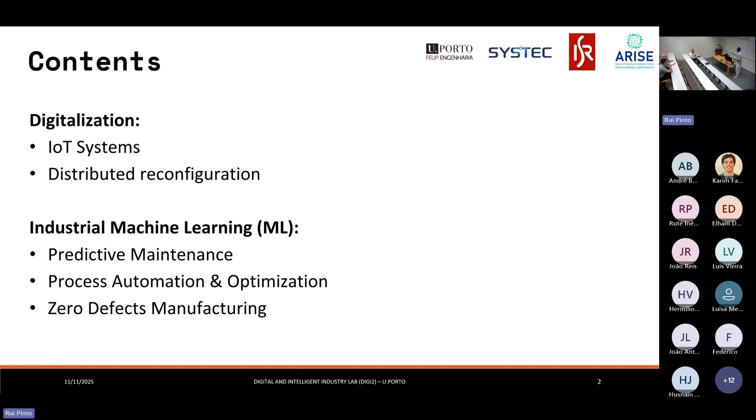So starting with digitalization, we at the lab developed this solution called GECO, that stands for Grip-inspired Environmental Condition Observer. That is an IoT device that is based on the ESP32, which is a kind of board that probably you can use in this course.

In this initial project that we developed, we aimed to develop a solution that would be easy to install in an industrial machine, just to plug it to the machine and start collecting data, in order to avoid having intrusive systems that require stopping the system to install the monitorization system.

This is regarding one of the main limitations we have in industry. Basically, when a machine is working, people from the factory don't want to touch the machine. They want that machine to not have new systems installed and not have someone programming it again. So in order to avoid that and facilitate the adoption of these kinds of systems, we developed this solution that is not intrusive to the machine currently.

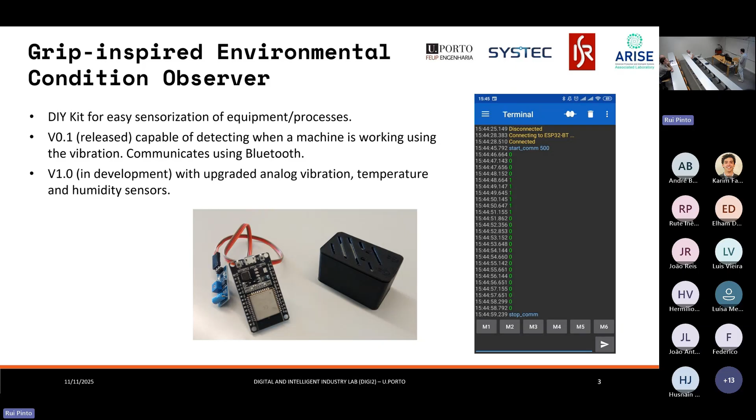As next steps, we aim to add some new sensors to the board, like temperature and humidity, so we can start collecting more environmental data, and also implement the interface for Wi-Fi to communicate via Wi-Fi and not just by Bluetooth.

The second project that I wanted to present to you today is regarding DINASORE. That is a tool that fits on the next level. So we have the IoT devices like the GECO, as I presented before, and in the next level we can have a platform like DINASORE, that is currently a runtime environment that allows the execution of function blocks.

These function blocks are tasks of software. So basically, I can program the system graphically, as you see on top, on the 4diac IDE. I can program the entire system there and then deploy it to a distributed cyber physical system.

So I can have multiple Raspberry Pis. I can program the code of each Raspberry Pi in 4diac and then deploy the code to each one of them.

This is a project that is available online on the following link, so it's open source. It implements function blocks in Python, which facilitates the implementation of machine learning algorithms and data analytics algorithms. So we can have function blocks to collect the data and then function blocks to process that data using the most used algorithms in the community. And it also has OPC-UA integration, which is one of the main protocols used in industry.

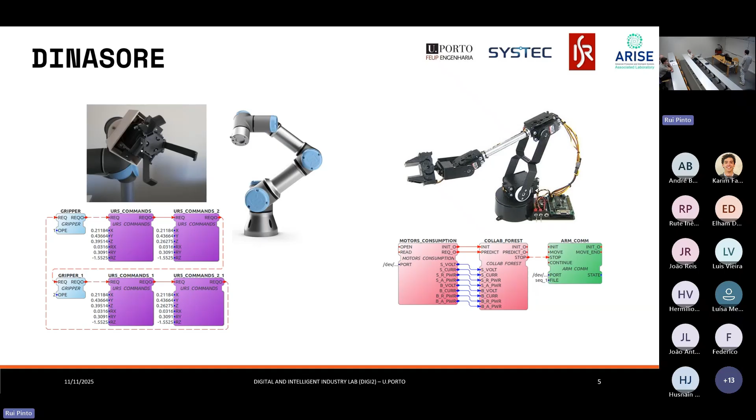Another interesting project about digitalization is the Smart Cut project, where we applied the concept of a digital twin. In that case, it was a simulator we built to allow operators to train to perform some operations.

This Smart Cut project was regarding the development of this digital twin simulator for operators working in the forestry industry. Portugal has a large forestry industry, mainly in Castelo Branco and similar places, producing a lot of wood from eucalyptus and other trees. They have industrial machines to cut and process these trees. In that project, we built a simulator based on the concept of a digital twin so operators could train before going to the real machine, practicing operations before working on it directly.

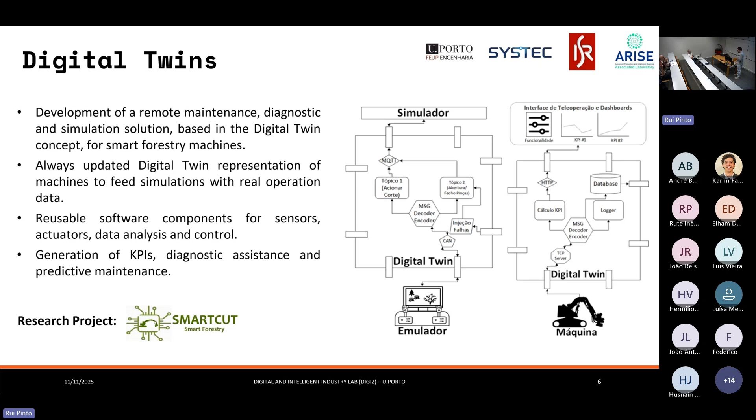We developed a second digital twin for performing predictive maintenance, so we could check when the machine was good or not good, and monitor the status of each machine. One was basically a simulated reality for the operator to train on, and the other was operational, to monitor the state of the machine. We collected different data from different sensors and used that data to try to predict when some components were degraded from the process.

Moving on from the digitalization part to the part more about the algorithms and the use cases we can do with the data collected from the shop floor.

The first use case I will present is regarding predictive maintenance. We have three different types of maintenance: preventive and corrective maintenance, which is basically the type of maintenance we do with our car. For instance, when we change the oil every 5,000 or 10,000 kilometers, we are performing preventive maintenance because we have a fixed schedule to make that maintenance, every 10,000 kilometers, for a particular machine or component, such as the motor of a car.

Corrective maintenance is the opposite: we just perform maintenance when something breaks. For instance, if we have a problem in the car, we go to the mechanic to perform maintenance for that problem. That is corrective maintenance.

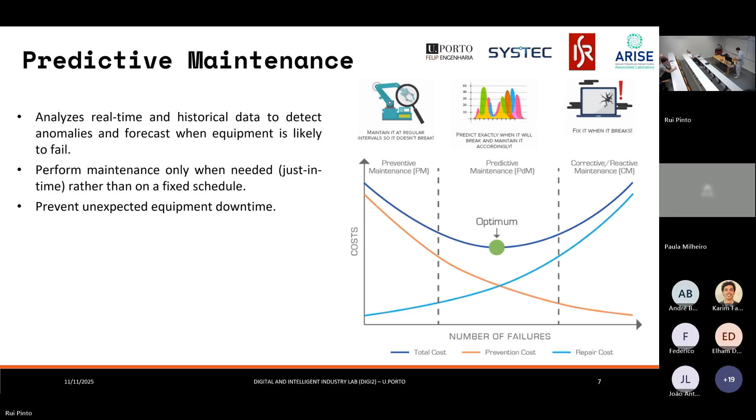One of the projects where we developed these kinds of systems was the Reclaim project, where we developed a system basically to predict when we need to replace a particular component.

In the use case we worked on, it was regarding a robotic arm from an industry we worked with, Gorenje, which is a manufacturer of white goods like fridges, washing machines, dishwashing machines, televisions—similar to Bosch and other manufacturers of white goods. In that process, it is manufacturing the tube of a dishwasher.

A dishwasher has a tube inside. Basically you have two metal sheets, one with a U shape and another with an L shape, and then you weld both sheets of metal together to form the tube of the dishwasher.

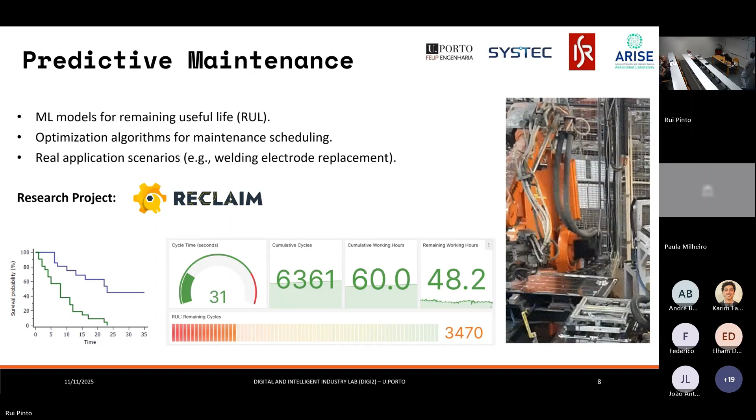The second project where we developed an algorithm for predictive maintenance is regarding the IndTech project. That's a project with a car manufacturer, Stellantis, a big car manufacturer that has a factory here in Portugal, in Mangualde.

Basically, in the factory they have batteries on autonomous vehicles that transport the components for building the cars. Imagine you have different stations, and then you have AGVs, these autonomous vehicles, that transport some of the components for the operators to mount the cars.

These autonomous vehicles have a battery, and in that case it was not a lithium battery, it was another, older type of battery. These batteries have problems — they degrade over time, like the batteries of our cell phones.

In the algorithm that we developed, we aimed to predict when we need to replace a battery. Over time, the battery gets degraded, starting to show degradation, and we wanted to identify when this degradation was higher, so we can replace the battery of the autonomous vehicle.

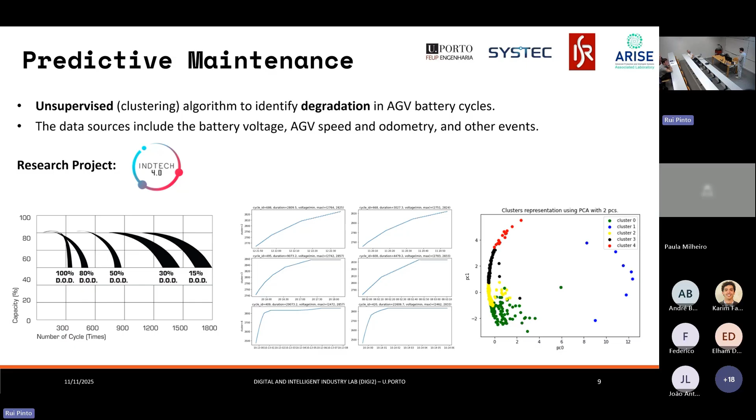Also within the IndTech project, we have another development that we made — this time not related with predictive maintenance, but more related with process optimization.

As I told you before, the Stellantis production plant has different stations where the operators perform operations on the car. In one station they add wheels, in another they install the seats, in another they install the mirrors of the car, and they produce different types of cars.

For instance, there they produce the Peugeot Partner, the Citroën Berlingo, and different types of cars — some are commercial ones, others are familiar ones.

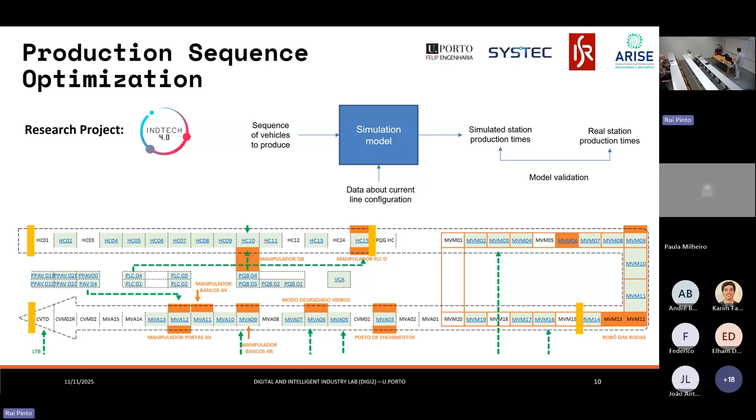Secondly, we have an optimization algorithm that uses that simulation algorithm to optimize, to find which is the optimal sequence that produces less delays. So we can have basically the best sequence of vehicles that will produce less delays.

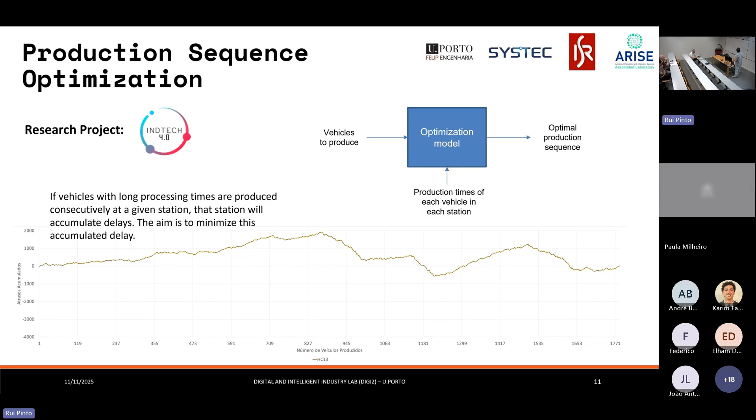The goal here is to optimize the allocation of tasks to those devices. Because, for instance, imagine that one of these devices breaks. If one of the Raspberry Pis breaks, the line stops because I'm not able to execute the software that is on the Raspberry Pi if it breaks. But if I have an automatic system that reconfigures the line, when I detect the Raspberry Pi that is breaking, I reconfigure the line, so I put the software that is executing on that Raspberry Pi on another device. This way I can maintain the execution of the entire distributed system.

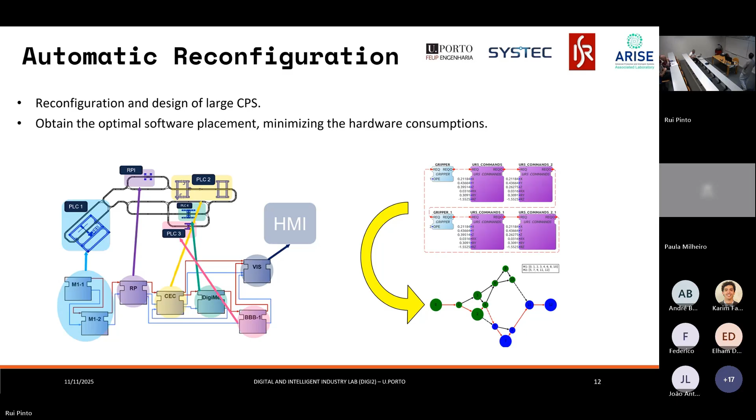Regarding that, we developed a system that basically maps the pipeline of tasks into a graph, and then using this graph representation, we have a genetic algorithm that finds the optimal placement of each task in each device, so we can have this optimized execution of the entire pipeline.

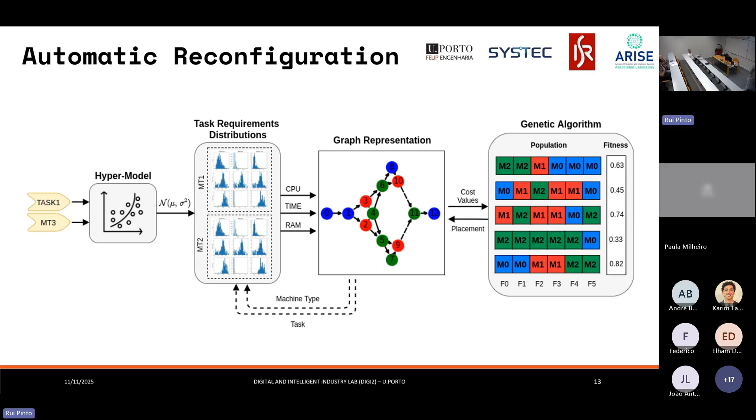On the right side, we have the genetic algorithm that experiments different combinations of tasks in different devices, in different machines, like machine 1, machine 0. So it tests different combinations of execution of this task, and then it finds the optimal allocation of tasks.

In that video, we see one of the executions of the algorithm. The algorithm is testing where to execute each of the tasks, basically minimizing the costs of RAM, of CPU, of network traffic. To minimize these costs, it experiments with different types of assignments, and when it finds the right one, it deploys the system.

Now it restarted the animation, so we can see how it tests different associations of machine to task. When the association of a task to a different machine changes, the color on the representation changes also. So it tests different associations of a function block to a different machine, a different device.

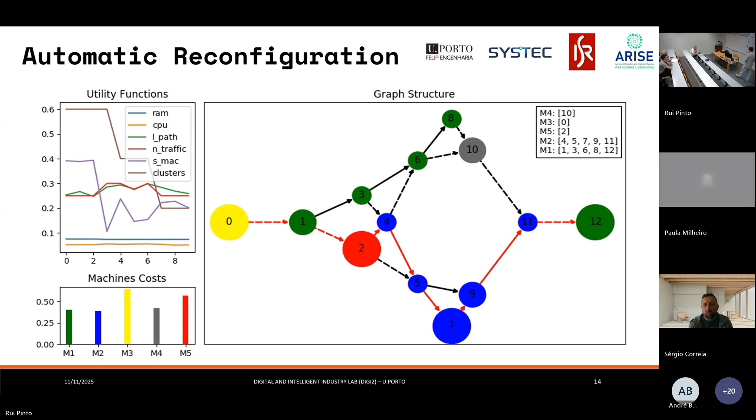Okay, moving on to our last use case regarding zero defects manufacturing. This use case aims to reduce as much as possible the number of defects that we have in a shop floor, in an industry.

For that, we have different actions or different components that we can develop for this kind of system. We can develop systems to detect defects. These are like vision systems that you install at the end of the line and check if the product has a defect or not. So these are the kinds of systems developed for detection, able to detect if you have a defect in the product or not. This way you avoid having the operator looking for defects the entire shift, because this is a hard task.

Then, if you detect a defect, you can have different actions, other different components. You can repair the defect. That is the more typical action.

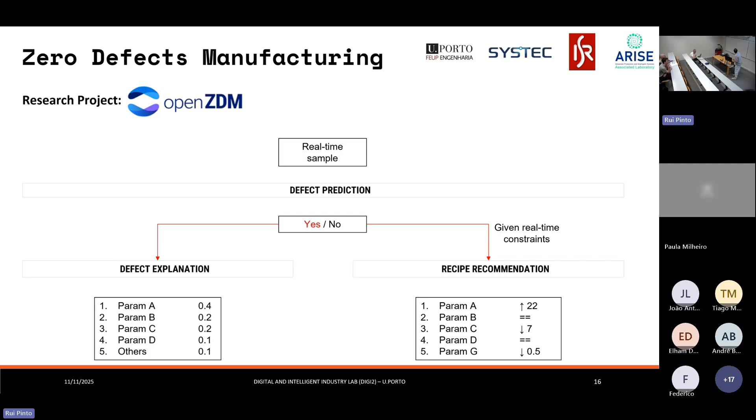This was developed in the OpenZDM project. Let me just go back, because basically in the OpenZDM project we are working with Sonae Arauco, that produces wood panel boards. They have different factories in Spain, Portugal, Germany, South Africa, and Sonae aims to develop an algorithm to predict the defects before they happen.

The process we are working on is the melamine coating process, where we have a particle board, basically the type of board used in furniture that you buy at IKEA. Then you have two sheets of paper that they glue to the particle board. This process of gluing the paper to the board and then pressing it at high temperature and high pressure can cause defects on these boards, which I will show you later.

One of the components we aim to develop is basically this algorithm to predict when we have some deviation on a sensor, so we can avoid the machine producing that defect.

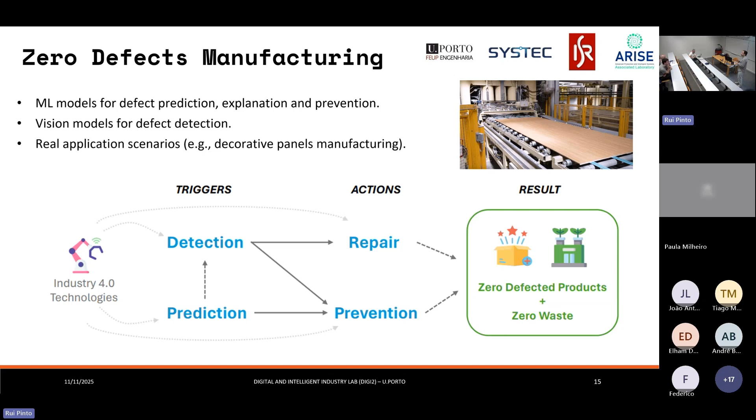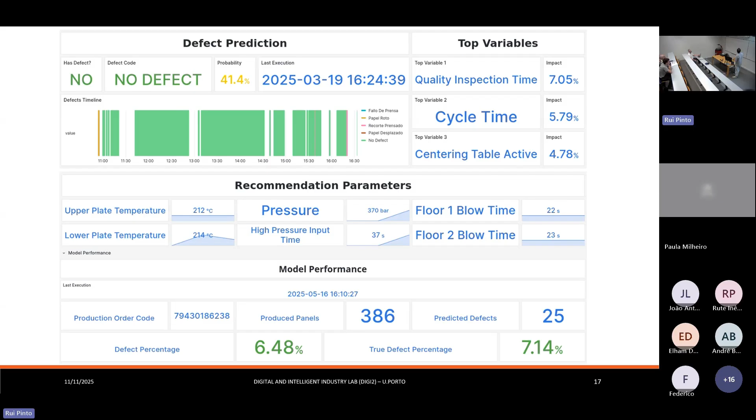So overall, this is the dashboard for prediction and prevention of defects that we developed for Sonae.

This is another tool that we developed. It allows us to simulate new products. Imagine that I want to produce a new type of board. I can simulate here the characteristics of the board I want to produce, the width, the length, the types of reference, the types of papers I want to use.

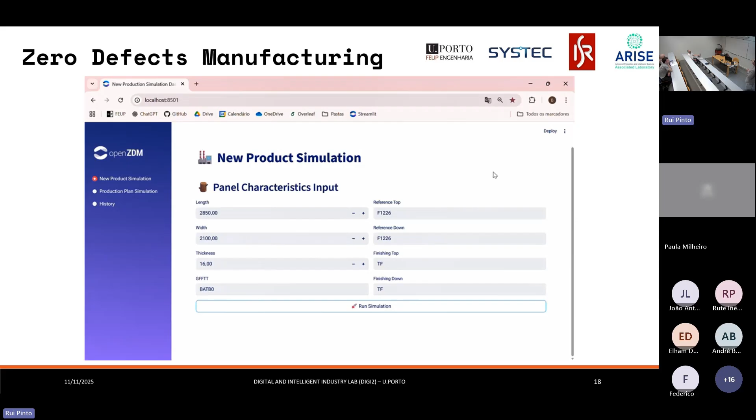Then the simulation algorithm provides the recommended machine parameters, such as the temperatures, and also provides an explanation of why we provide these recommendations. Together with that, at the bottom, we provide the estimated number of defects of the board. So before starting to produce this board, we already have an estimation of how many defective boards we will have.

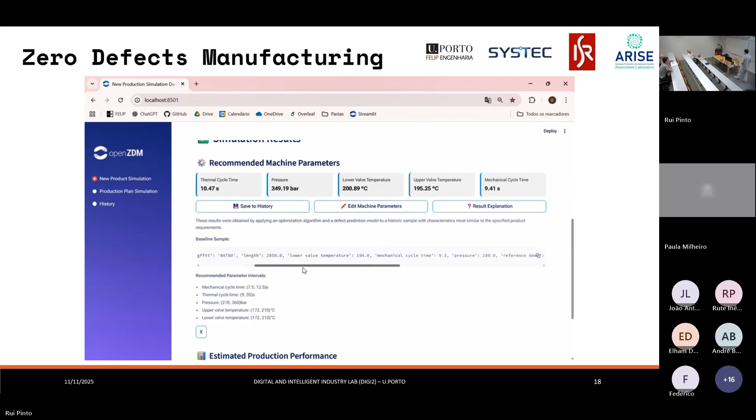Regarding the other component we developed here on the OpenZDM project for defect detection, we built a vision system based on the NVIDIA Jetson Nano, with a Jetson Nano and a camera. Basically, this is the inspection station of the board.

The board is a quite large panel, 6 meters by 3, so it's quite large. Currently, before using this vision system, the operator had to look at the entire board, which is a white board, for defects like the ones we have in this image on the left side.

On the left side, we have some points, some black points that are a kind of defect. In the other image, we can see a defect that is a line, more white than the rest of the panel. So these are two of the types of defects found on these panels.

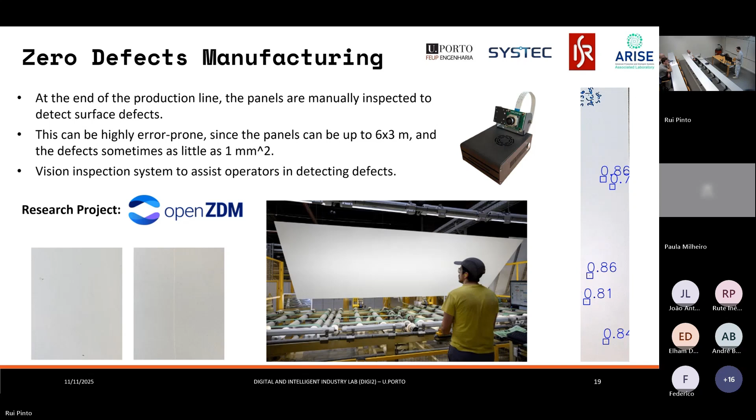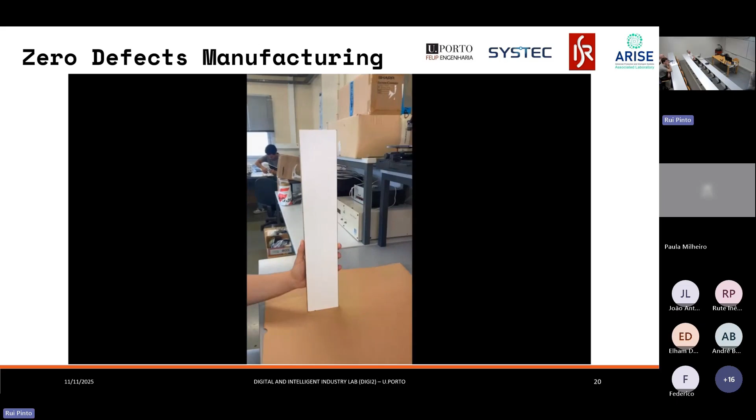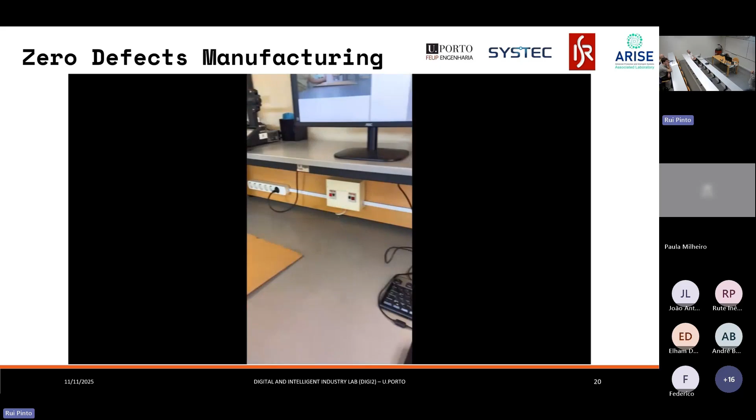Here you can see a demo of the laboratory prototype that we currently have. We have a vision system connected to some sample boards in the lab, and we have developed the vision system along with a dashboard showing the defects on the boards.

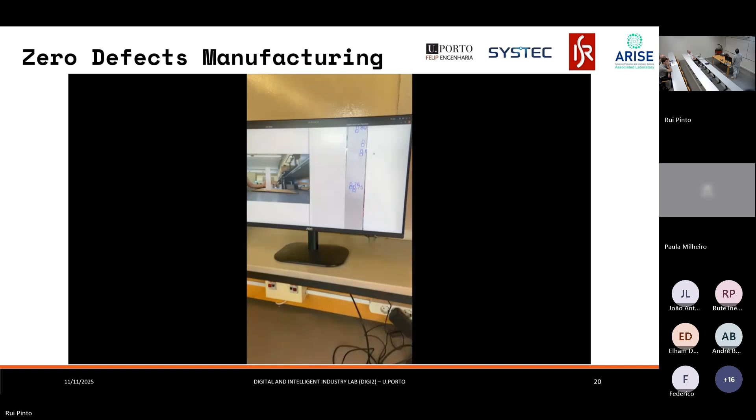In order to conclude, one of the points from this talk is that there are shifts in the strategy of industries. In the past, industries were a lot more reactive, both in maintenance of components and in correction of defects. We are moving from a reactive perspective to a more predictive and preventive strategy, where we predict and prevent failures before they happen, and predict defects to optimize the process much more than in the past.

The second point is that the data we collect from the shop floor and from the process is one of the enablers and drivers for this shift in strategy. We basically need data, and good data, to have these kinds of algorithms. If you talk with someone who developed this kind of system, they will tell you that more than half of the journey is having good data and good systems to let in data, because you are only able to implement these kinds of systems if you have good data. But data is very, very complicated.